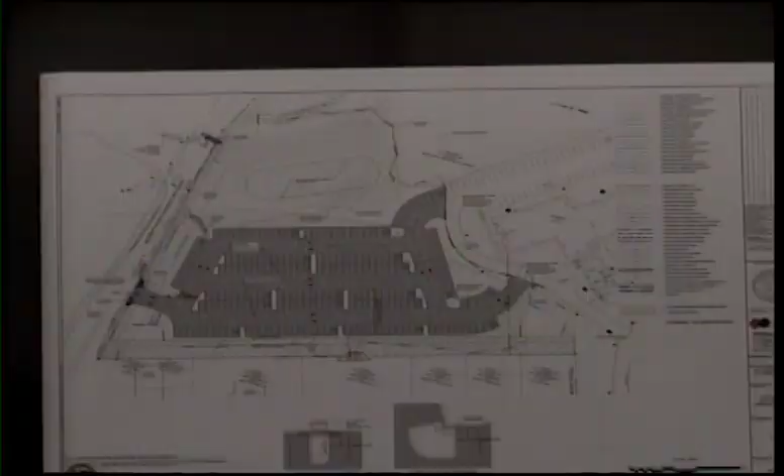So it's a new 226 space parking lot. This is adjacent across McGinley Road at Forbes Hospital off of Haymaker. Access is from McGinley and from the existing paving, the existing parking. Stormwater goes to the east, up on the page, and to the west, at the bottom of the page, are existing houses. For those houses we are proposing a landscape buffer, just to keep the lights and everything away.

Parking is for the employees. They will offer a shuttle service. We do have sidewalks along the space where we are developing. I do believe we're in the works of preparing a subdivision, so chances are the municipality will see that sooner than later. So with the subdivision, we will have sidewalks along the frontage of this parcel.

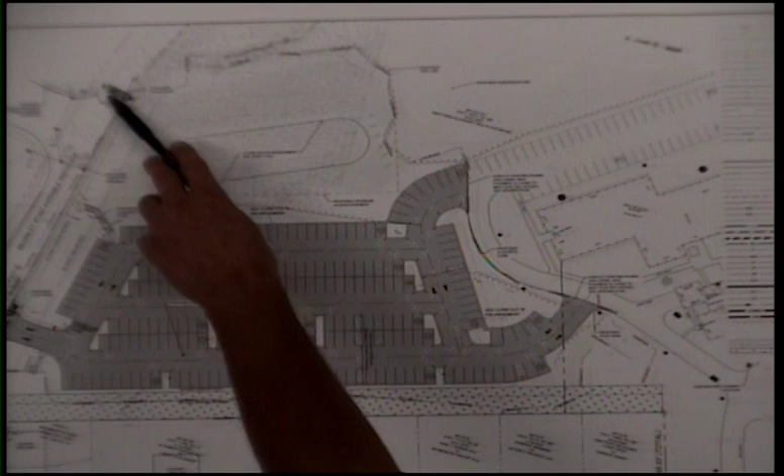And then down here at the existing access into the hospital, we'll have another crosswalk across McGinley, that's this one right here. So, stormwater detention pond, the NPDES has been submitted with the Conservation District. Those are all the highlights. Questions? Does the panel have any questions, any concerns?

Is DPEP satisfied with your water runoff remediation? They're currently reviewing it now, it was submitted the beginning of the month. You said there was going to be an expansion after this, a possible expansion after this? This is the expansion of their existing parking. No, okay, yeah.

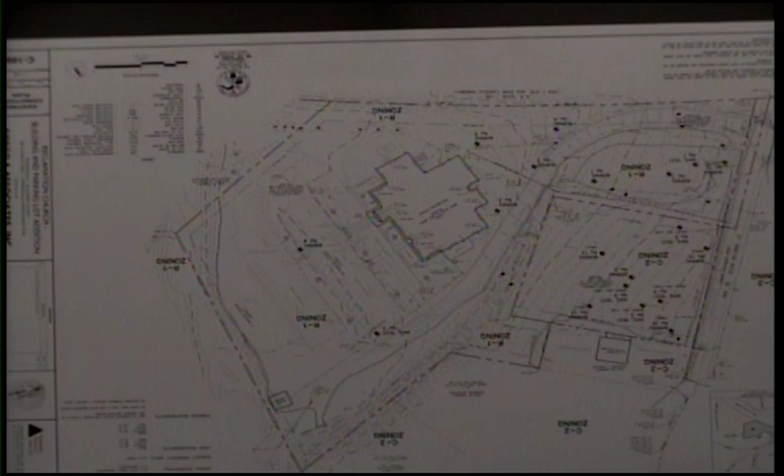So I guess I should start with the subdivision since that was the first item. I have the existing conditions plan here. The existing conditions plan shows we have St. Martin's Drive, and down off of the map here would be Old William Penn. Hey John, orient it towards you. Sorry, it's upside down, rotate it down on the screen.

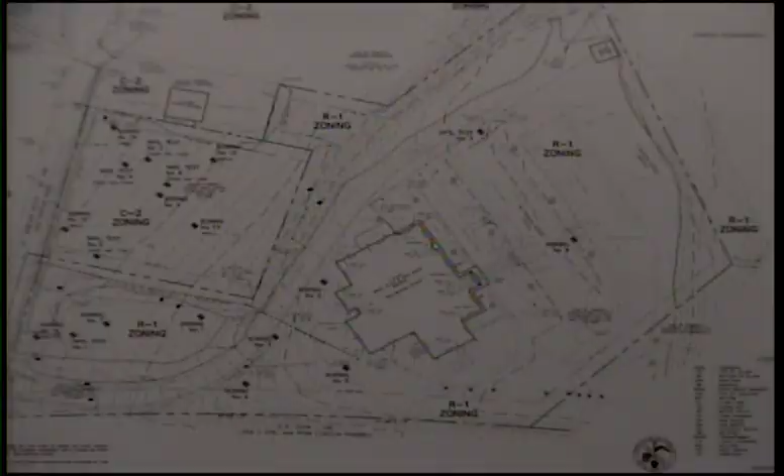And that's for 92 spaces? Yes, there's 92 existing parking spaces on the large parcel itself. And then we also have a land development application that represents an additional parking lot being constructed.

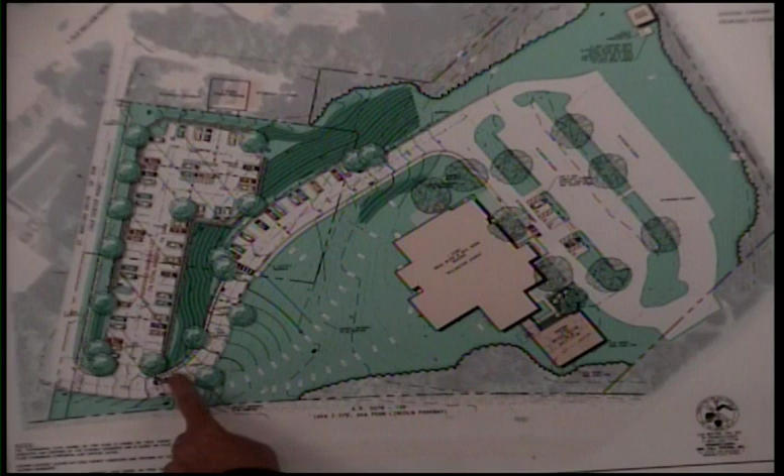We're gonna have a sidewalk that's actually going to be located along the existing drive. It's gonna cross over because we added 18 cars up here at this level. So the new driveway is pretty steep at this point, then it levels out at this location and gets a little bit steep again until it gets up to the existing elevation.

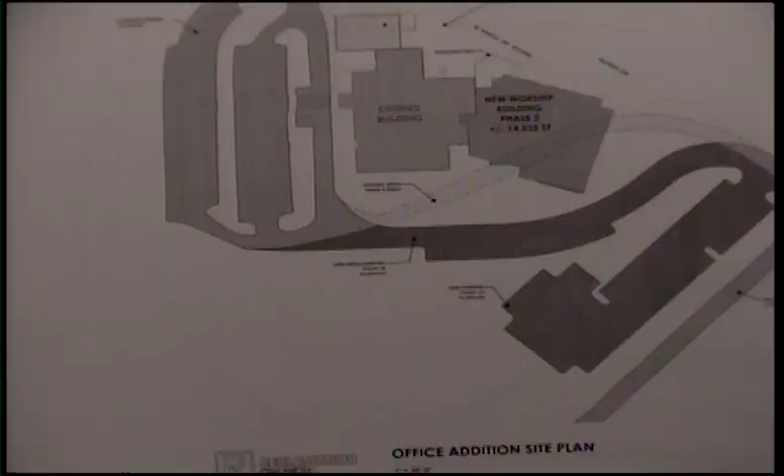The 92 cars that exist - the reason for this, if it's okay, I'm gonna flip again and use the architect's drawing, because it actually represents what's proposed for the future. So right now, as our site plan shows, I'll pull this down a little bit.

Our site plan shows we have an addition that we're proposing. It's a little different configuration. Here's the existing parking - the parkway is actually now on the top of the sheet. And here's the new addition, which is a little bit different. I just got these plans, Mr. Wielden, this afternoon.

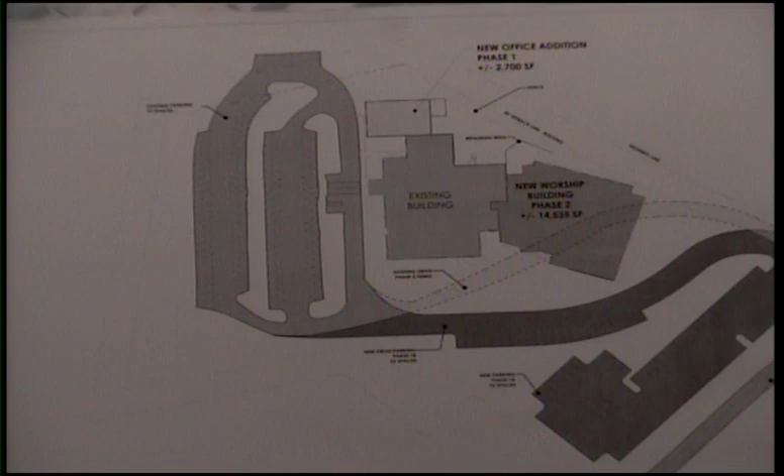The architects have gone ahead and actually revised the footprint. They've reduced the size of the footprint of the new office addition. I will get you those drawings, I'll email them to you. But this is a little bit different configuration, and it's about 300 some square feet smaller. It's all a win-win - same location, just tighter to the existing building.

But you can see this wasn't on my site plan. This is a new worship - I wouldn't call it a building, it's actually just an addition onto the existing building. That isn't on our drawings, FMG's drawings, at this time, because it is highly conceptual. It's intended to be built, but not right now.

Mostly, to be quite honest, it's funding. This is a church, it's a growing church, a very vibrant church, but they still have limitations as well. So the small office addition at this time is phase 1 of the building expansion.

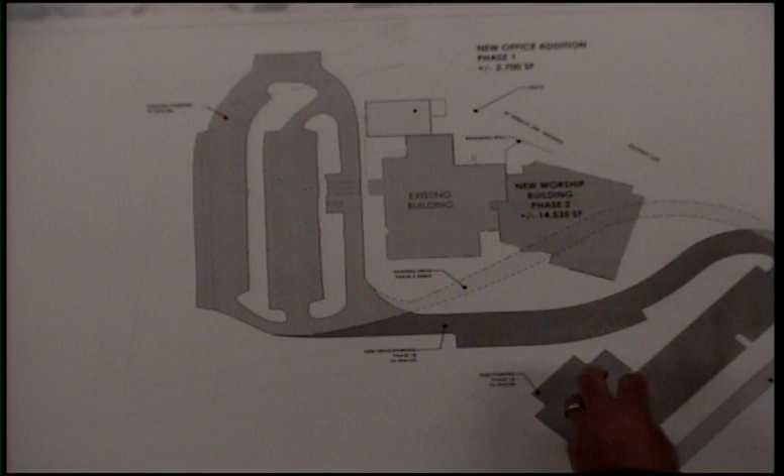Phase 2, years from now, most likely will be - it could be 10,000 square feet, it could be 15,000 square feet. But I will say this: the stormwater management facility that FMG is proposing and working on getting approved by your engineer is down here underneath the parking we're gonna be constructing. It can handle up to a 15,000 square foot addition, plus this 2,700 square foot addition, plus the existing building and the new road and the new parking lot. That's all gonna be able to be handled in the new system.

So we're planning ahead for this large addition, but it's not in the works at this time. Hopefully, if all goes well, I'll be back here in a year and say, guess what we're gonna do?

I was going to ask you the timeline on that possibly.

Well, I should have introduced him when I got up here - Pastor Jeremiah from the church is here with me. Pastor, how are you, sir? Honored to be here. He might be able to answer some questions if you have some questions regarding their sanctuary and their space and their use of the building itself.

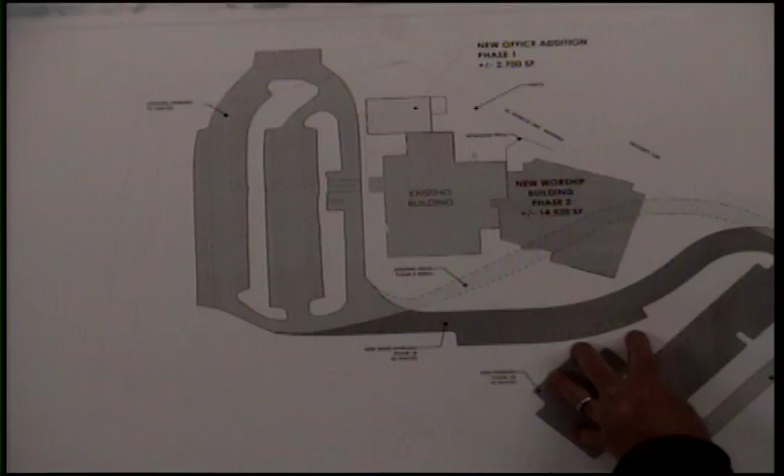But at this time, it's my understanding that that 14,000 square foot addition is not gonna take place in the immediate future. We gotta get the parking lot built first - that's phase one.

I do have a question: when you build the addition, won't you need additional parking again? This parking can handle that. I want to say this too.

We have communicated with the school district to see if we can make a pedestrian or vehicular connection with the school's parking lot. Obviously, not much is going on at the school on a Sunday morning, Christmas Eve, or Easter Sunday. So the idea would be to share some of their parking and have a direct access, because it's literally a few hundred feet away. You have to go around some ball fields to get to their parking lot, but the hope would be that we'd be able to utilize their parking.

We did reach out to them, and their response basically was, can we just get through our addition work first? The school board was like, we just need to focus on this one step at a time. Exactly, and of course that's great, that's wonderful - you don't need it right away anyway.

So yes, there are plans to expand, to get more parking. We meet code, we exceed municipal code, but obviously that's not always realistic in what a facility needs - we all know that, we've all played that game. So when that happens, we might need to do a parking needs analysis or something like that. That's gonna be a big project, both funding and design-wise. But this is the first step - we're moving the driveway for a reason, as you can see on this plan.

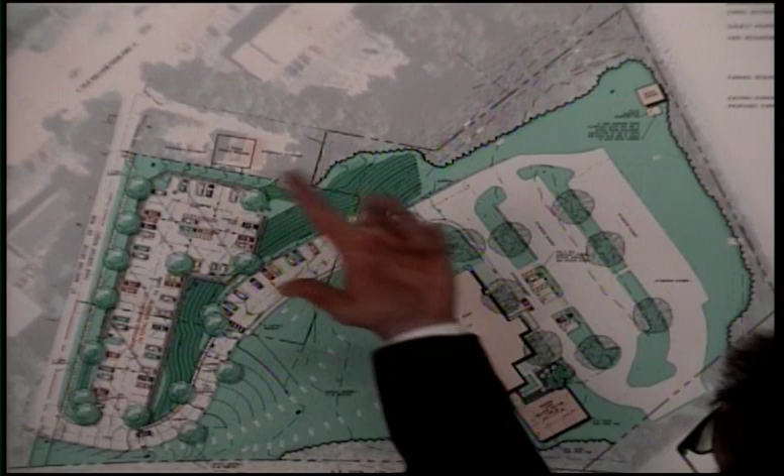Let me go back to the drawing, there's a couple of oak trees. So you're referring to the salon located right here that has access to St. Martin's? We're proposing just a retaining wall in that area that's going to be about 6 to 8 feet high, and of course get higher as it heads towards St. Martin's. No buffers at this point.

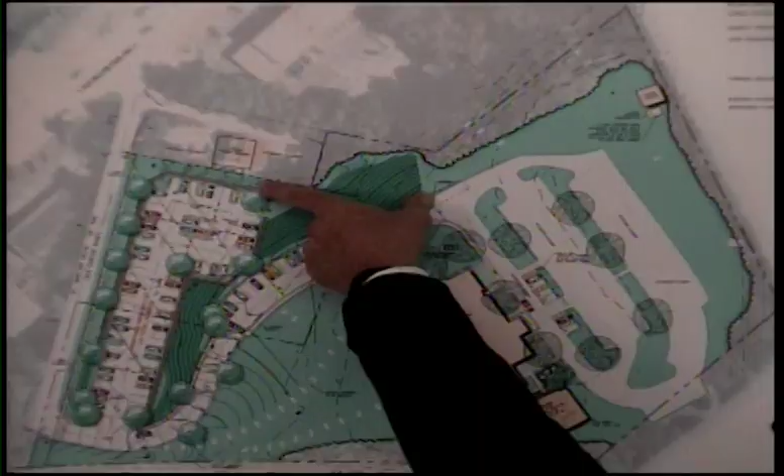That's 6 to 8 feet at the salon? Yes, and again it gets higher as you go down towards St. Martin, but it's a few feet high on the easterly end here, and then it obviously picks up grade as it falls down there. Stormwater-wise, we have a swale we're putting in to ensure proper drainage, because right now it's our understanding there's a significant amount of water working its way down to the salon and also the retail center.

Our design actually picks up a lot more water than we probably would need to by code, just because we're trying to be good neighbors. And you're saying it would help them? Yes, we're pushing it kind of tight up against that property line, but we are going to get a swale graded in that's been engineered. It's going to tie into an inlet, so it's all going to be piped and then go down the street. Does that answer your question? Okay.

Okay, anyone else? Let's seek a motion to approve. I'll make a motion to approve. I'll second it. All in favor? Aye. Any opposed? Just for clarification, there were two items: a subdivision and a site plan.

Do you want to make a motion for each of them individually? We can do that. Okay, so that was for the first one then, 23-5 SUB, the subdivision. Let's go for the first one, seek a motion to approve. That would have been for 23-5 SUB, correct, that was for the subdivision.

Now do the same thing again for the site plan. I'll make a motion. Second? I second. All in favor? Aye, aye. Any opposed? Okay, good, the ayes have it.